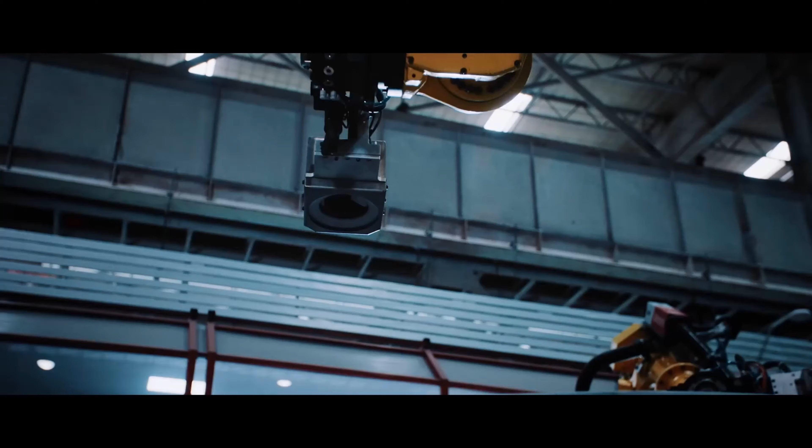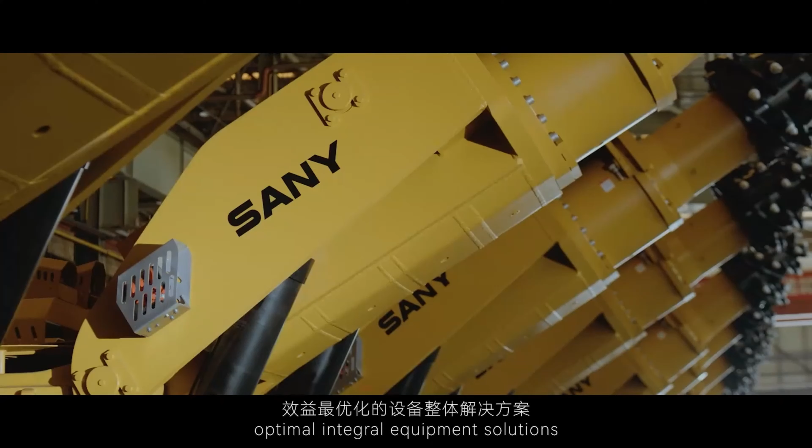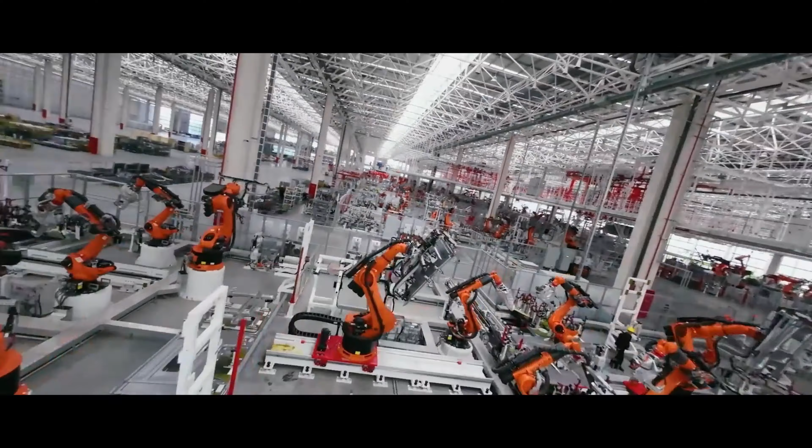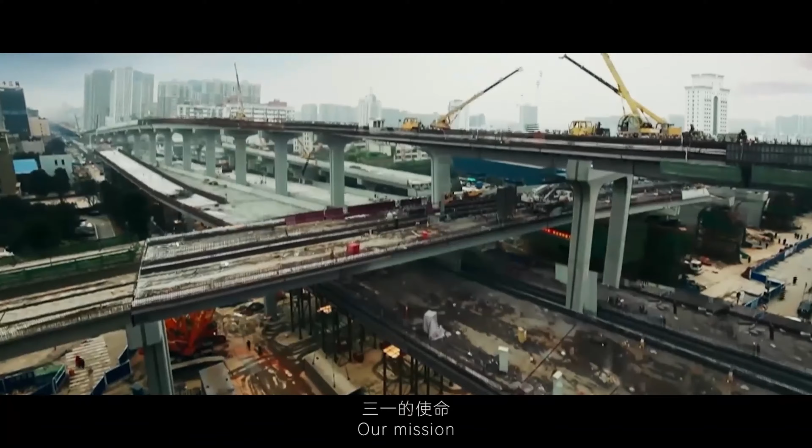At SANY, we are creating new tools, smart and powerful. Since 1989, SANY has been offering quality products and optimal integral equipment solutions. Our obsession with quality and technology has been driving the reformation of the manufacturing industry. Over the last 3 decades, we have forged an elite engineer team and mastered core technologies including engines and hydraulic parts. Aspiring to be a world-changing company, we continually search out ways to go above and beyond. Excelling in design, R&D, and quality control, we have won trust from our global clients. Our mission is to improve the well-being of humanity. Quality changes the world.

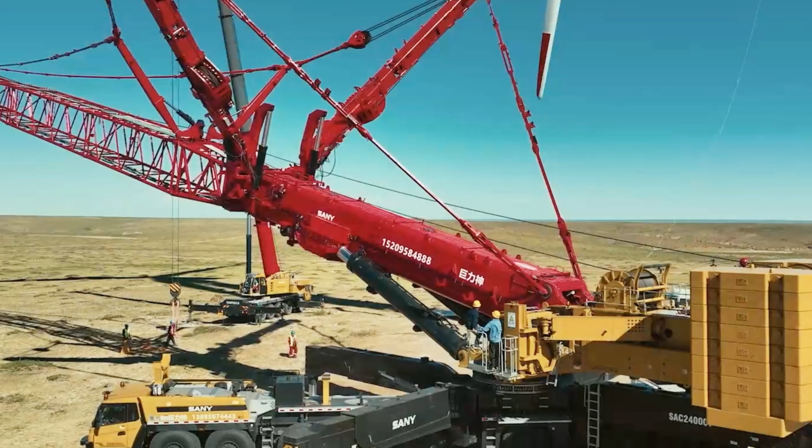Thanks, Mr. Wu. This is a long story. Let me start with SANY's founder, Mr. Liang Wengen. Mr. Liang has always emphasized the importance of digital transformation for a traditional manufacturing company. He has a famous slogan, either turn over or capsize, which means if we don't transfer our business to a digital way, SANY will lose its leading position in the market. This is an impressive saying. Sounds simple, but it's full of profound truth.

SANY has been continuously engaged in digital transformation for many years. In terms of mechanical engineering, we have already digitalized 3D modeling. But from the electrical engineering point of view, SANY had a lack of 3D electrical design. This issue is the root cause of many other problems. For example, the efficiency and accuracy of the design were not good. The cost of the harness couldn't be estimated and controlled. Large quantities of raw material were wasted. We lacked bargaining power in front of the harness suppliers.

Well, that sounds quite confusing. Well, thanks to the pandemic, it was a crisis and a chance also. During the pandemic in 2020, much work was stopped, but the SANY management team had time to evaluate how to enable 3D for electrical design. After investigation and analysis, we all agreed that SANY Group was missing an advanced electrical design platform. All famous electrical design software had been evaluated, including international and domestic software. Finally, we selected EPLAN.

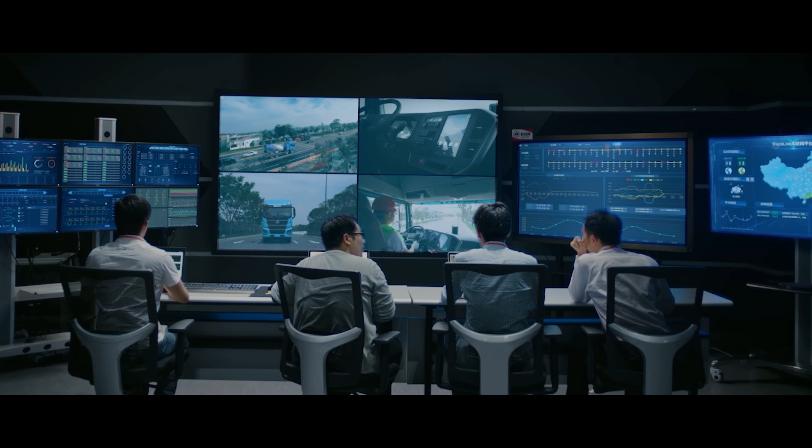So why did SANY select EPLAN in the end? Well, as you know, considering the complexity of SANY's requirements, like the diversified product portfolios, the market in different continents, the layout of the R&D department, and the special requests from data and IT governance points of view, we requested software providers to validate their solutions first. The vendors should have success stories from the functional point of view and the capabilities from the business know-how point of view. After 3 months of online communication between EPLAN and SANY, we all agreed that EPLAN has the best product portfolio, the deepest business know-how in the construction machinery industry, and the best professional service team. Right after the pandemic was being controlled in July 2020, we were able to travel. We signed the contract with EPLAN, and the cooperation started.

As we know, SANY is a global company with many subsidiaries and product lines. I can imagine it is difficult to request all electrical engineers to give up the old software and use a new one. As the leader of research and development, how did you figure out this challenge?

You're right, it was challenging. The EPLAN project was kicked off in mid-July 2020 and closed in January 2021, a total of 6 months. There are 21 research institutions and 145 engineers involved from the SANY side. This project was on a tight schedule, a heavy workload, and a big scope, which was a huge challenge for both of us. Firstly, we guaranteed the resources by involving senior executives from both SANY and EPLAN sides at the beginning. Secondly, we share the same mindset in the project team: 1, focusing on the major issues, solving key problems; 2, optimizing the process; and 3, solidifying the process.

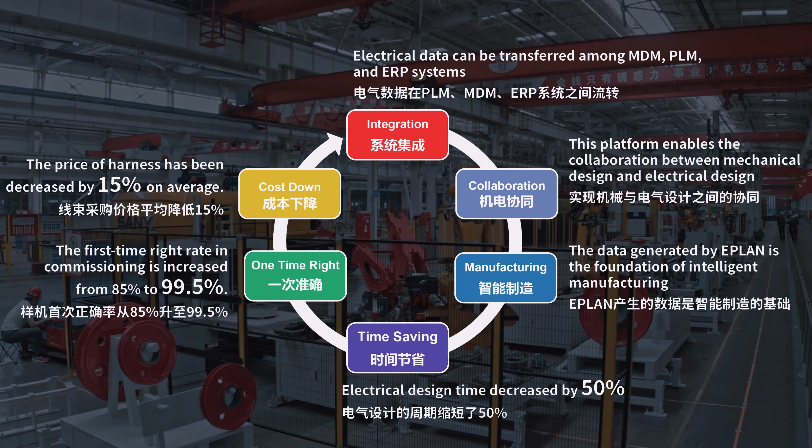The electric data can be managed by the PLM system. This is the essential request from SANY's management team.

Data sharing among the master data management system, PLM, and ERP systems has been enabled.

The platform enables collaboration between mechanical and electrical design. The standard data generated by EPLAN is the foundation of intelligent manufacturing.

The electrical design time has been decreased by about 50%. The first-time right rate in commissioning is increased from 85% to 99.5%.

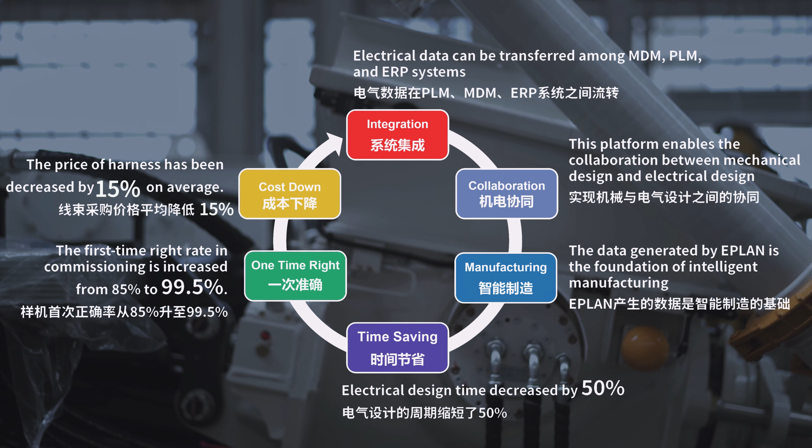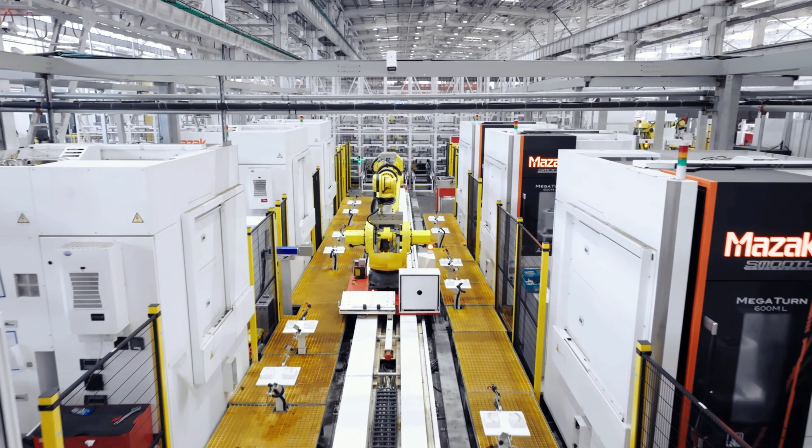The material cost of the harness can be estimated automatically, giving us more bargaining power with suppliers. According to the report from the sourcing department, the price of harness has decreased by 15% on average.

That is a very significant improvement.

Thank you so much, Mr. Shi. You are welcome.

Let's move to the engineering department and check if we can interview an electrical engineer.

Hi, Zhenghui. Nice to see you. Nice to see you, Mr. Wu. Please sit down. Could you please introduce yourself to EPLAN global users?

I'm Wu Zhenghui from the R&D Digital Center. In 2020, I was responsible for implementing EPLAN into SANY.

After we went live in 2021, I was responsible for promoting EPLAN at the group level. Since 2022, I've been responsible for optimizing the electrical platform and training the key users.

Zhenghui, how long have you been using EPLAN? I've been using EPLAN for 2 years. Before that, I used CAD for schematics. Okay, it is very common in China. What was the process of electrical design before?

First, the schematics were generated by CAD, but as you know, CAD tools are the bottleneck of design efficiency and data management.

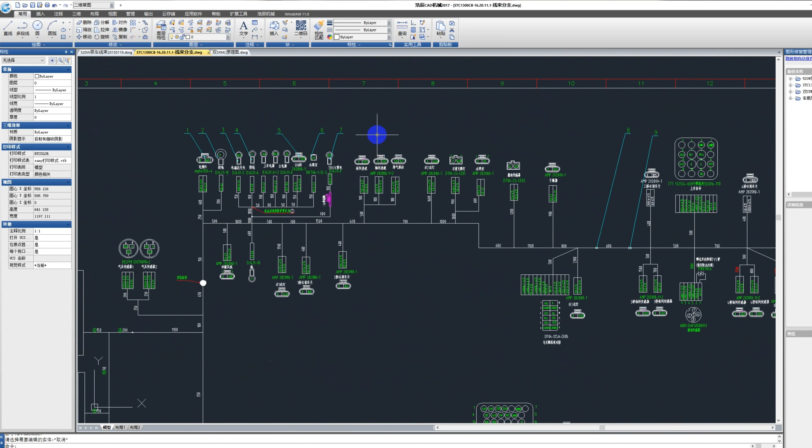The schematic doesn't have enough information to support manufacturing and maintenance, so more information must be manually created later.

This is very time-consuming and easy to make mistakes. You can see the length of the wire is copied from Creo to CAD manually.

What were the major problems during the electrical design process? I think there were three major problems. The first issue is regarding efficiency.

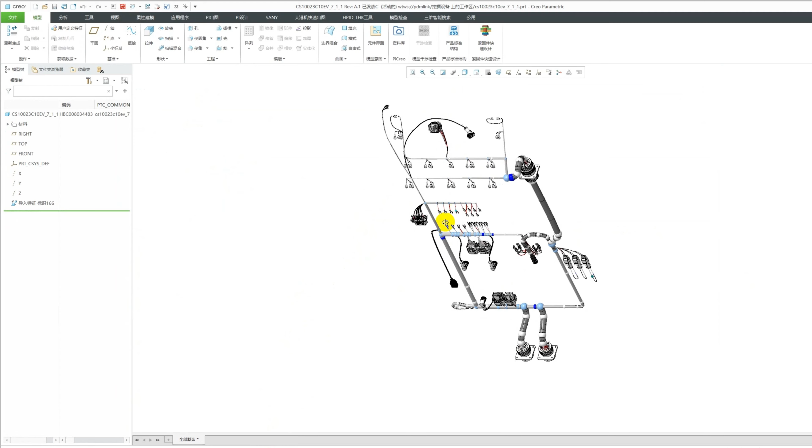As I described in the last question, the schematic must be redesigned. It is a waste of time. The second issue is change management.

When we need to create a new part based on a prototype, the schematic and 3D harness couldn't be synchronized automatically. For example, if there's a change in the schematics, it's hard to know what kind of change we have to make in the 3D harness.

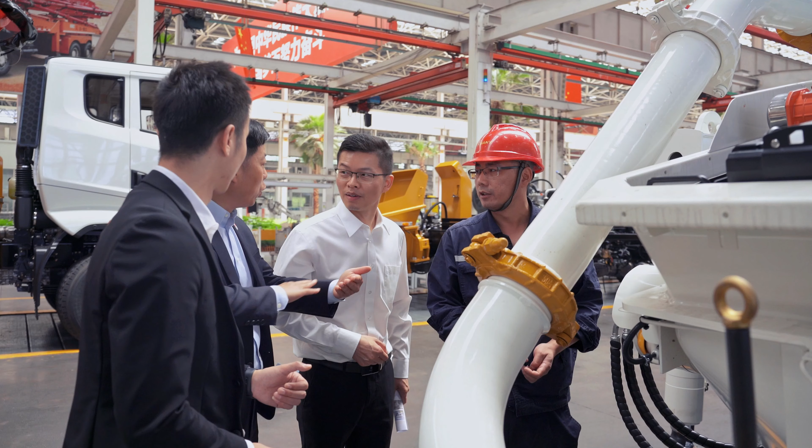The third issue is regarding collaboration between mechanical and electrical design. CAD can't provide 3D parameters to Creo, like the diameters of the bundle. In Creo, it's impossible to simulate if there's not enough space, or if there's any collision or interference.

In most cases, this kind of issue is found while commissioning. It's too late to modify the design from the beginning, which was a big waste of time and resources.

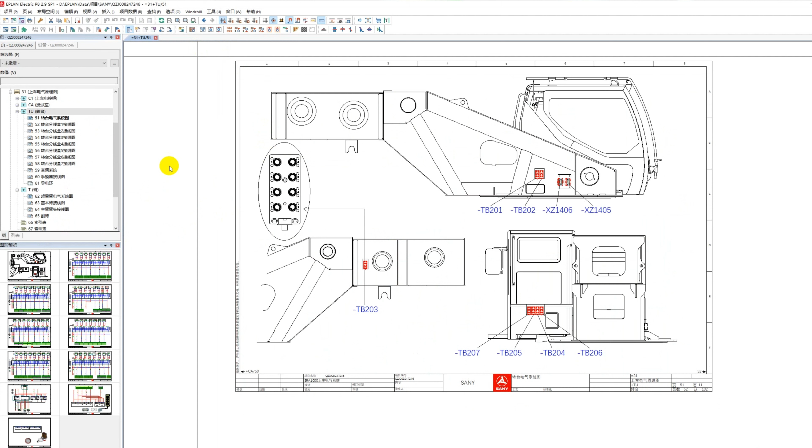So how did you use EPLAN to resolve these issues? Firstly, we deployed a unified part database at the group level. All design institutes use the parts and macros in the same database, follow the same design method, and use the same report.

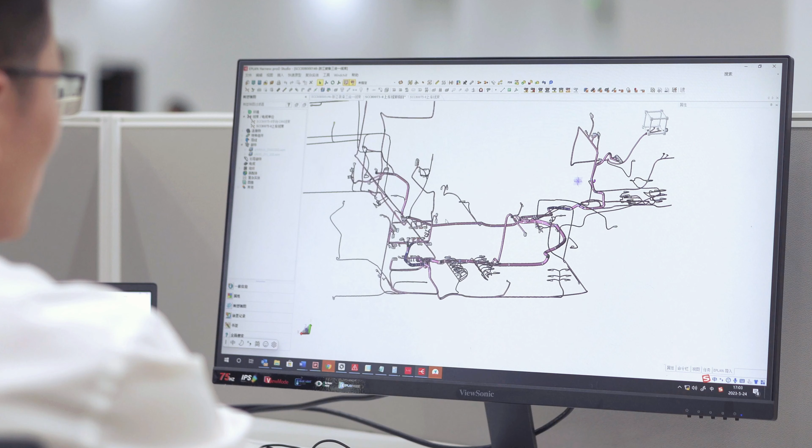We encourage modularization and reusing existing macros. This increases design efficiency by 30%.

In the EPLAN platform, 2D design and 3D design can be integrated together. The change from P8 can be synchronized to Harness proD. The change from Harness proD can be synchronized to a 2D nail board as well. Harness proD can use the Creo model directly.

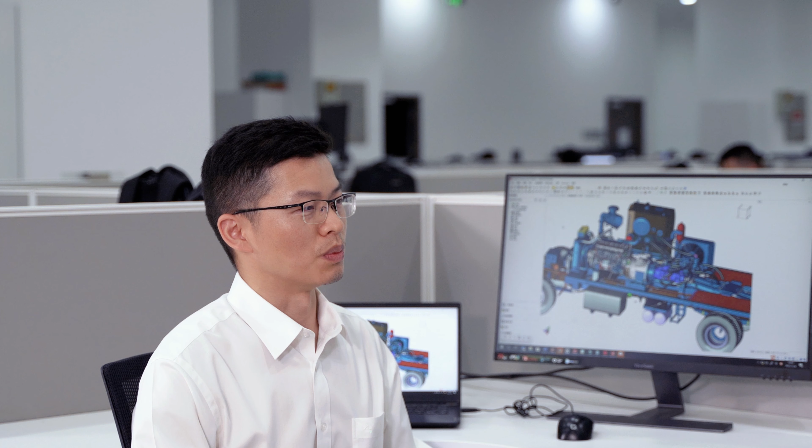Electric design can be based on the 3D model, which makes the design much easier than before. Because of the benefits we got from EPLAN, SANY's emerging business sectors such as equipment, hydrogen energy, and robotics are actively promoting EPLAN.

What else do you think has improved after using EPLAN? I think the biggest change after using EPLAN is that electric data can be transferred among different systems. This generates a lot of value.

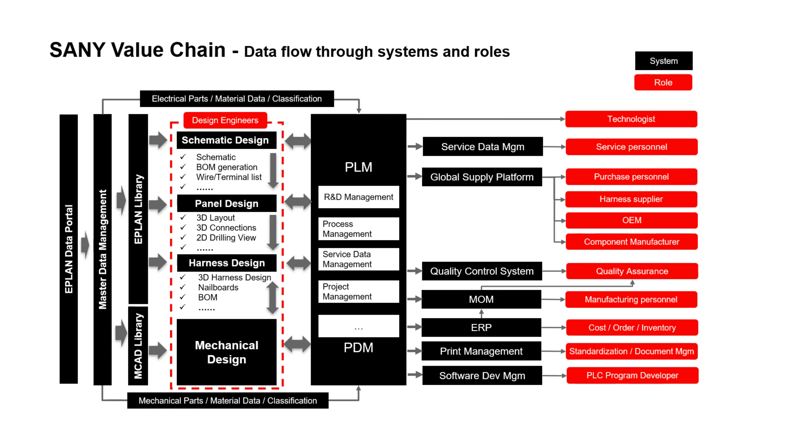Firstly, EPLAN is integrated with the PLM system, which manages all the data generated in the design process, such as BOMs, drawings, and harness. The PLM system acts as a hub and distributes approved data to other systems.

Secondly, EPLAN provides precise and automatic calculations of harness data, enabling us to accurately calculate the cost of harness.

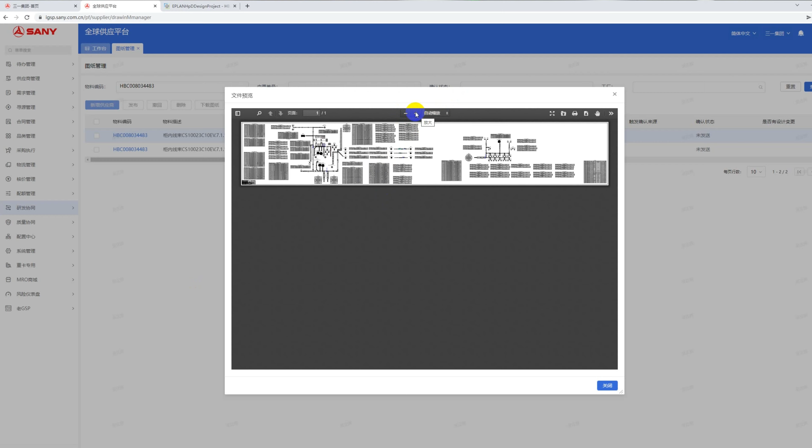Thirdly, the supplier of the harness can leverage the data generated from EPLAN directly. SANY's harness supplier can download the nail board, connection tables, and connector lists from the global supply platform directly. This will shorten the delivery time by 2 to 3 days.

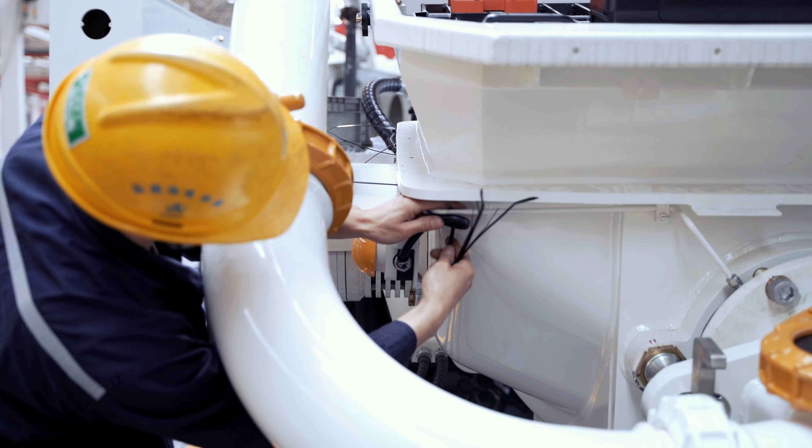Finally, EPLAN can create harness assembly instructions in HTML, which can be used by the assembly worker on mobile devices. The workers don't need as much guidance as before.

Wow, it seems that the return on investment is very high.

Thank you, Zhenghui. Thanks, Kirby. Thanks, EPLAN. Thank you, SANY. Let's move back to the studio.